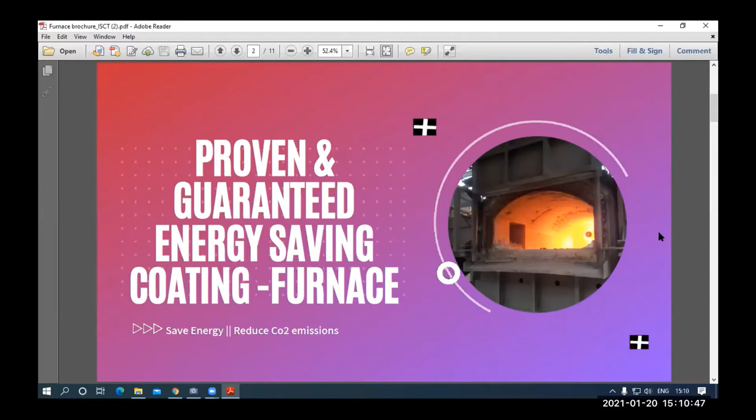In fact, World Bank, in association with CII, has also made one documentary on this technology, and it was floated some one year before. We can guarantee energy saving in any heat related process, any cold related process, from the range of 5% to 30%.

So why the question arises here? Why to apply energy saving coating for furnace? That is the big question when we talk to our customers.

So basically, what we have understood is that furnace is the heart and soul of the process. Furnace is the biggest thermal energy consumable equipment, and here is the process where maximum heat losses go to the environment. Then second, furnace consumes the maximum fuel, that is maximum thermal energy.

It may be electrical energy, it may be gas fired, it may be electrical fired, it may be diesel fired, or any medium can be there. Heavy energy losses are right from the furnace only, because whenever you go around these furnace premises, you will feel a lot of heat coming from the furnace. So that is basically the radiation heat.

And when the furnace is very new, and when we install this furnace, the very first year the furnace efficiency is very high, and as the time passes on, due to thermal shocks and various wear and tear in the furnace, the energy efficiency decreases year on year.

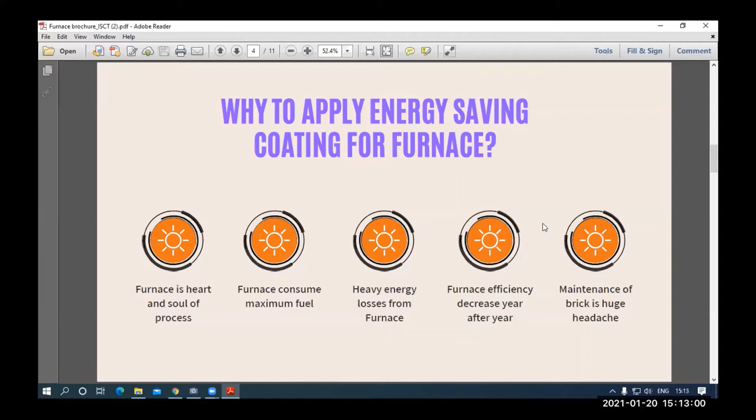This coating is basically in powder form, and it contains some very heat reflecting ceramics in it, which reflects radiation back into the process.

It has to be applied on the internal refractory bricks or on the external metal surface of any furnace or any heating equipment. Basically, it has high emissivity, meaning it absorbs maximum heat, and maximum heat is re-radiated back in the process.

Generally, the emissivity of refractory bricks or ceramic modules used in this furnace or ovens is around 0.4, and after application of this coating, with a coating thickness of around 250 microns, it improves the emissivity of that particular furnace or surface.

It has got high emissivity. It absorbs heat and radiates it back in the process. So it results in energy saving to the tune of 5% to 30%.

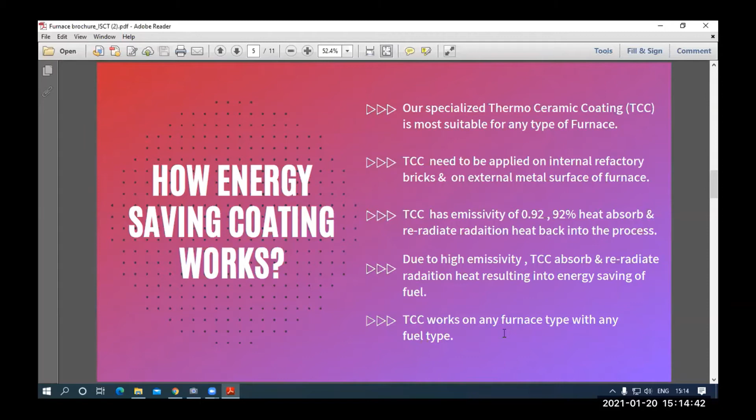So what we can offer to our customers is guaranteed energy saving from 5% to 30% in their present fuel consumption. Obviously, if there is energy saving, that directly reduces the CO2 emissions. Also, they can reduce their cycle time, that is production cycle time, and also increase production to the tune of 30%.

The profit margin is very crucial to the manufacturers because there is huge competition in various markets, so maintaining a handsome profit margin is very important for them. They can increase their overall profit by 20 to 30% on their present margins.

The next thing comes to ROI. How much is the investment and how much is the return on investment? The typical return on investment in any furnace or heating related equipment goes around 6 to 8 months, and the life of this coating is around 5 years. So every 5 years you have to recoat the system, recoat the furnace, so that the efficacy of the coating is maintained.

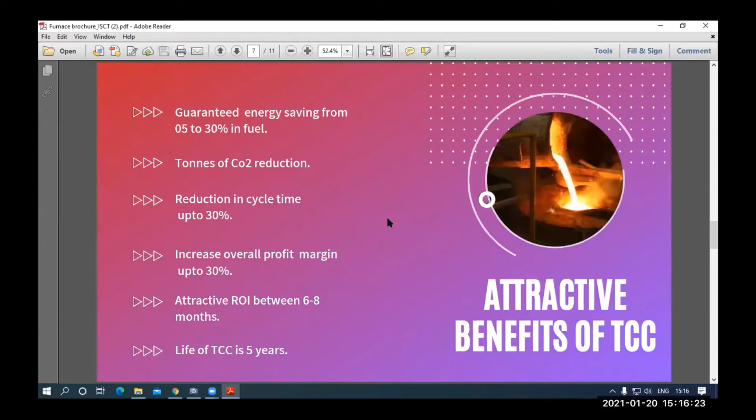We have very esteemed associations with some very big organizations of India, that is Bureau of Energy Efficiency, who have given a very good platform, the CII, and also UNIDO, GEF, and PwC has given us a very good platform to showcase our green technology products to various industries.

I would like to share another file with you.

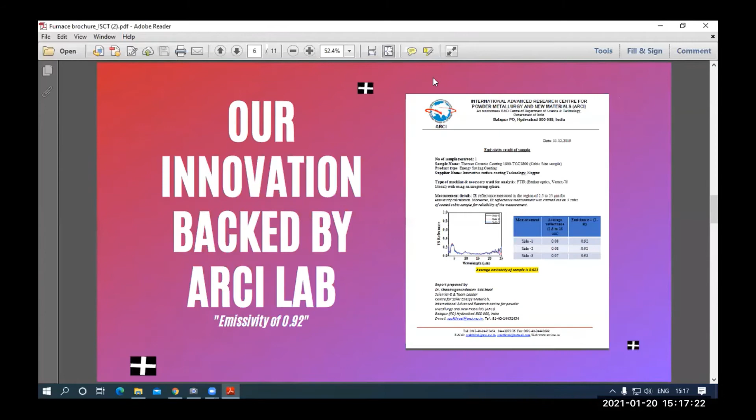Our coating has got a high emissivity value. That is basically what emissivity is - an object's ability to emit infrared energy back in the process. Emissivity ranges between 0 to 1, those are the general values. These are the values of refractory bricks and ceramic fibers - the emissivity values of this material vary between 0.4 to 0.5.

Mr. Pankaj, are you sharing any presentation right now? We are not able to see that. You might have to unshare and then start sharing again, and then I will be able to see the screen. I think what I request is, sir, there is an option to stop share. You can first do that and then start sharing again. I think the next time it should be visible.

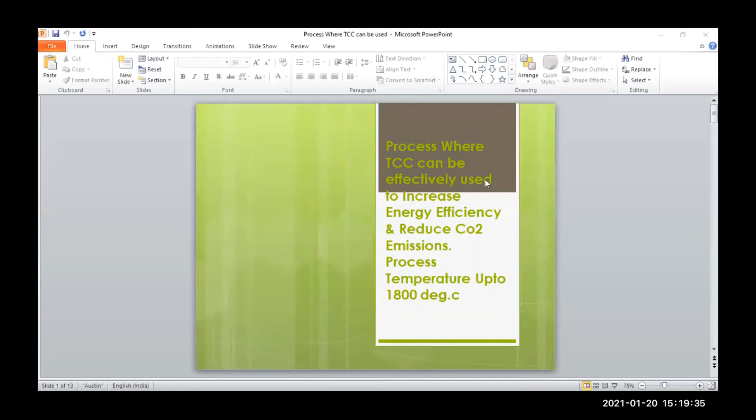Basically, our coating is a high emissivity coating, and we improve the emissivity of the refractory bricks and ceramic fibers also. Emissivity is basically an object's ability to emit infrared energy back in the process. So whatever insulation you have installed in the refractory furnace or ovens, they have certain emissivity, and the emissivity of the refractory bricks and ceramic fibers used in the furnaces ranges between 0.4 to 0.5. So what it does - for example, if 100 units of heat is imparted on refractory brick, 60% of that heat will be absorbed and 40% of that heat will be re-radiated back in the process.

When we apply our coatings, it improves the emissivity. What it means is, if we impart 100 units of heat on the surface, only 10 or 15% of that heat is absorbed and transferred to losses, and 90 to 92% of that radiant heat is reflected back, emitted back in the process. This helps in faster heating of the process, reduced fuel consumption from 5 to 30%, and also reduction in CO2 emissions.

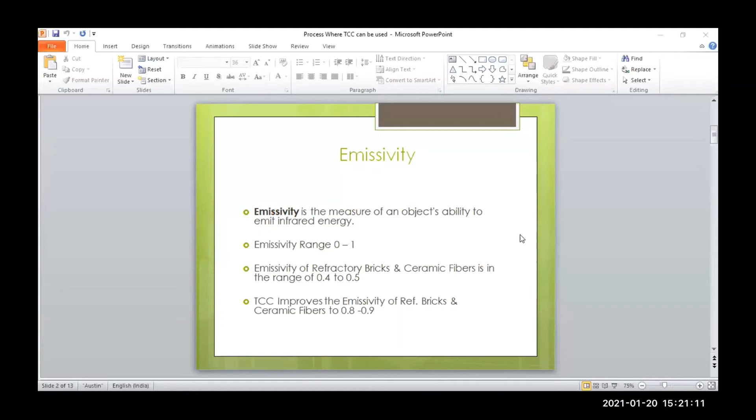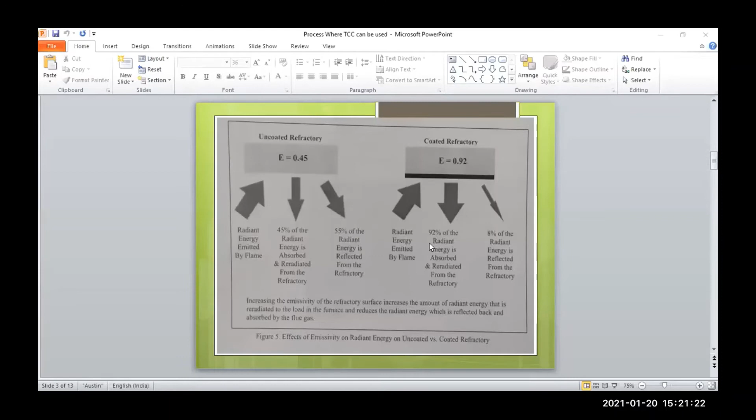Apart from reheating furnace, ladles - it is almost a very big heating equipment.

Then steel melting shops, coke furnaces - these are the huge heating equipment in any steel industry. Then stoves are there, the vertical equipment. The height of one stove is around 100 meters.

External wall of coke ovens can also be applied with these coatings. Doors of coke ovens - I have seen one steel company where there were around 88 doors.

So there is a huge scope of stopping heat reduction in these doors also. Then hot air pipelines are there - we can apply these coatings on these hot air pipelines.

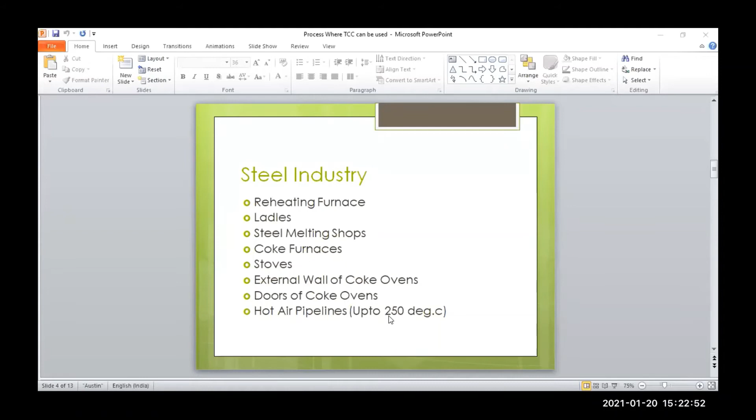Then there are hot air pipelines. External walls of furnace can also be applied with our coatings, low temperature coatings.

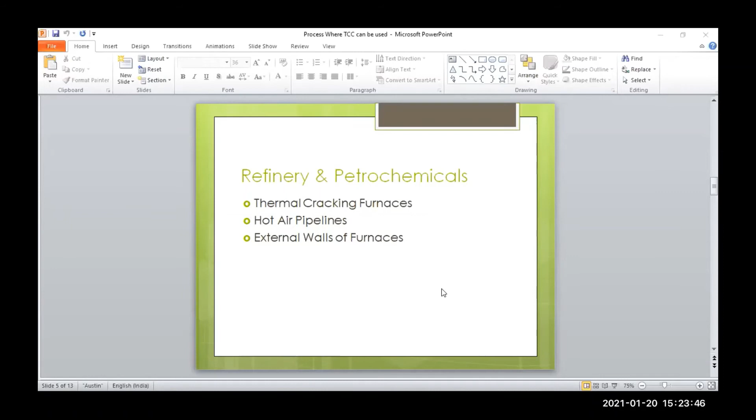Then there are fertilizer industries where reformers are there. These are very big heating equipments, and ceramic fiber insulation is used there along with refractory brick. So we can also apply that coating on this ceramic fiber and refractory brick. Then steam pipes are there, refractory bricks are there, ceramic modules are there.

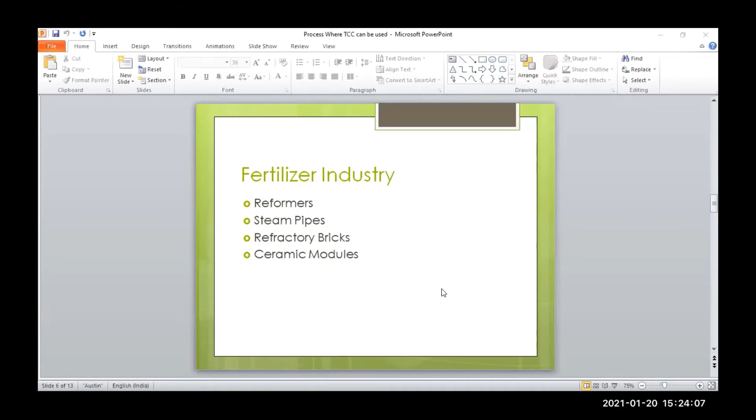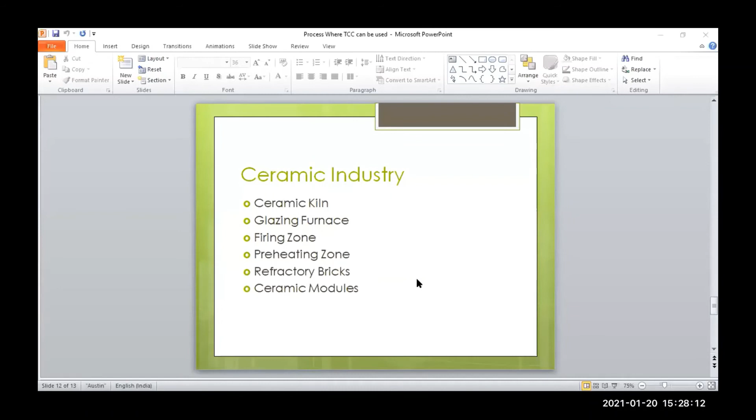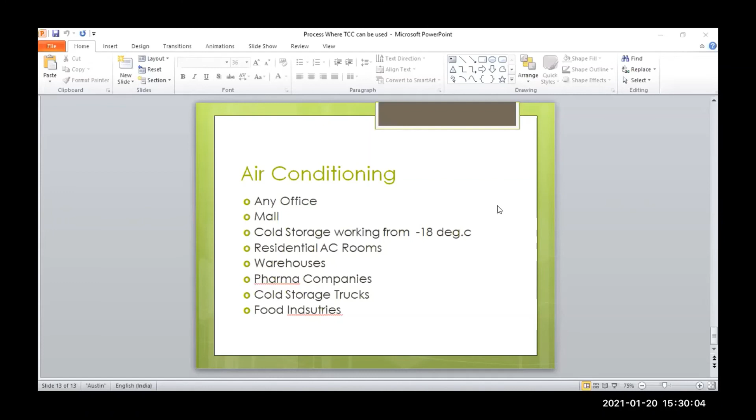So the uses of these coatings are very huge, and we are in this business for 18 years, and we have done a number of projects. We have some very good credentials from various automobile companies also.

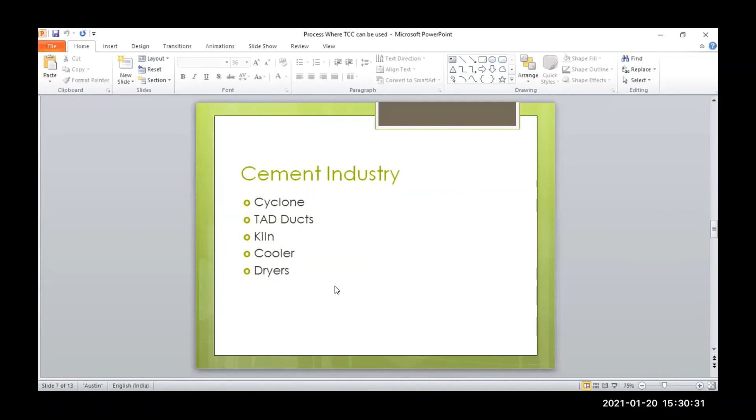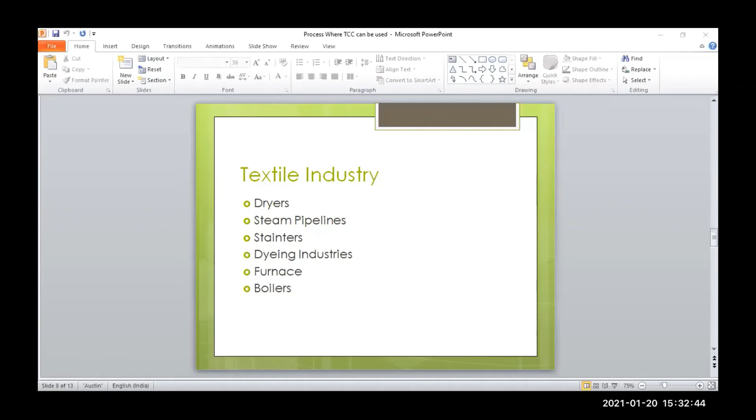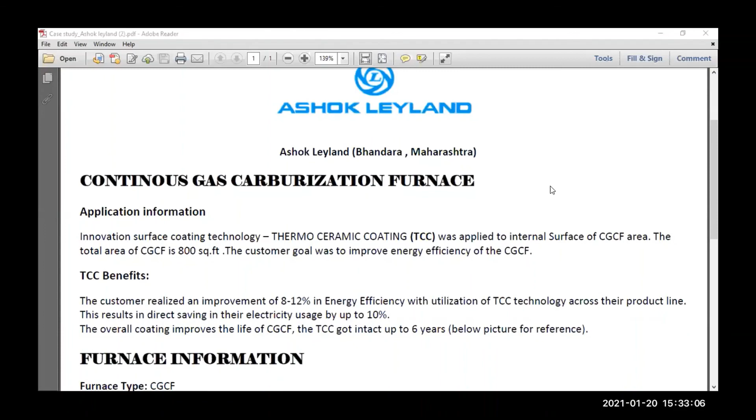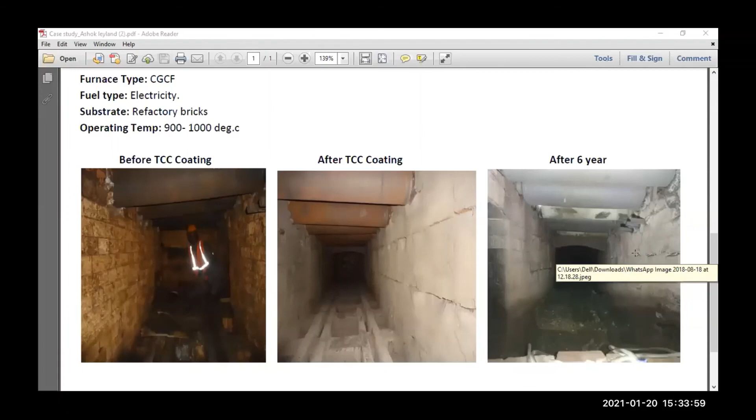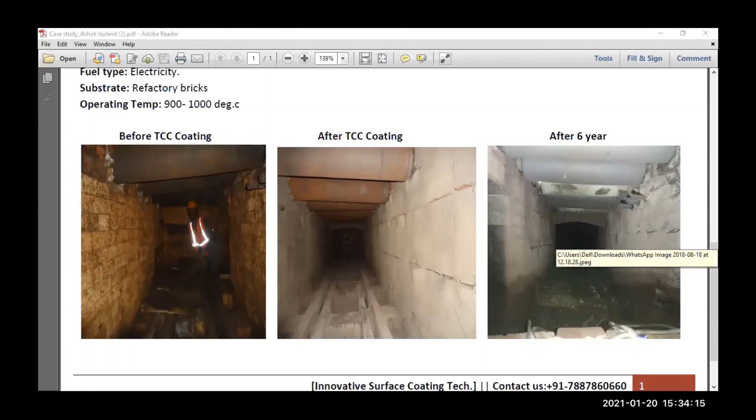After application of this coating, when curing is done, it binds with the surface and forms a welded surface, so it doesn't peel off. That is the USP of this coating. It has been almost 8 years since we did that coating, and it is still intact. The ROI of that project was hardly 6 to 8 months, and the rest is benefits up to 8 years. So this is one case study.